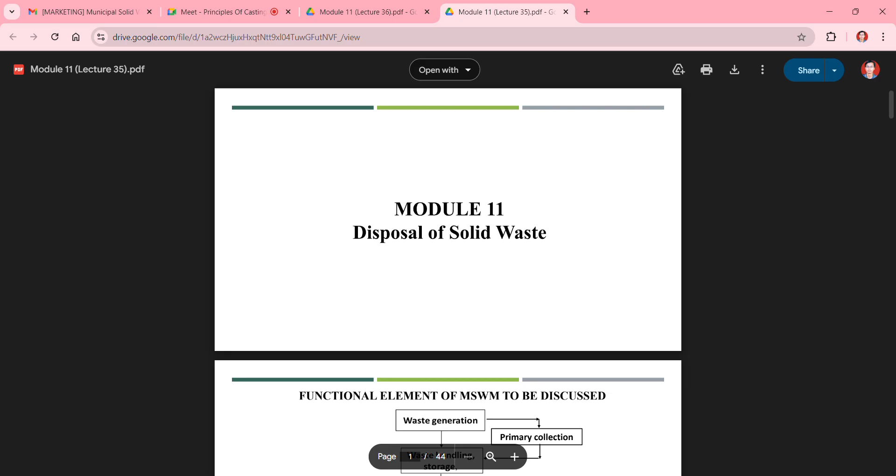We were talking about disposal of solid waste, which includes the landfill of the remaining solid waste left over after different treatment processes like metal recovery, anaerobic digestion, or composting. Whatever waste residue is left has to be landfilled. In the previous lectures, we talked about the criteria for selecting landfill sites and the basic requirements to create a landfill. We have to create a proper system to collect the leachate and gases, and in previous week lectures we learned about the collection system for leachates.

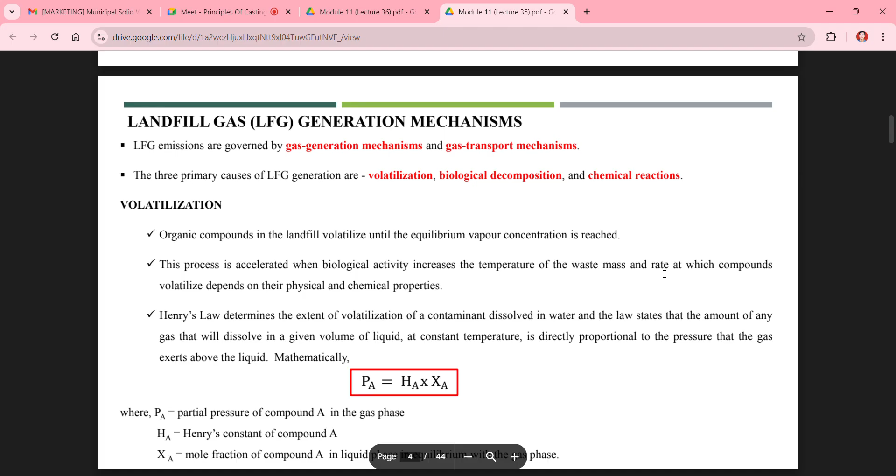In this week's lecture we will talk more about landfill gas collection, which is generated from the landfill sites after landfilling of municipal solid waste. There has to be a proper landfill gas collection and treatment system at every landfill. This landfill gas is termed as LFG. What is the generation mechanism of this LFG? These are emissions governed by gas generation mechanism and gas transportation mechanism.

There are three primary causes which promote the formation of LFG. First is volatilization, then biological decomposition, and third is chemical reaction. These are three different primary causes which influence the generation of landfill gas during the landfilling process.

Organic compounds in the landfill volatilize until the equilibrium vapor concentration is reached. This process is accelerated when biological activity increases the temperature of the waste mass. As we discussed, these compounds have a certain volatilization temperature, and until that temperature is reached, the compounds are not going to volatilize. So temperature increases due to the different biological activities happening inside the landfill.

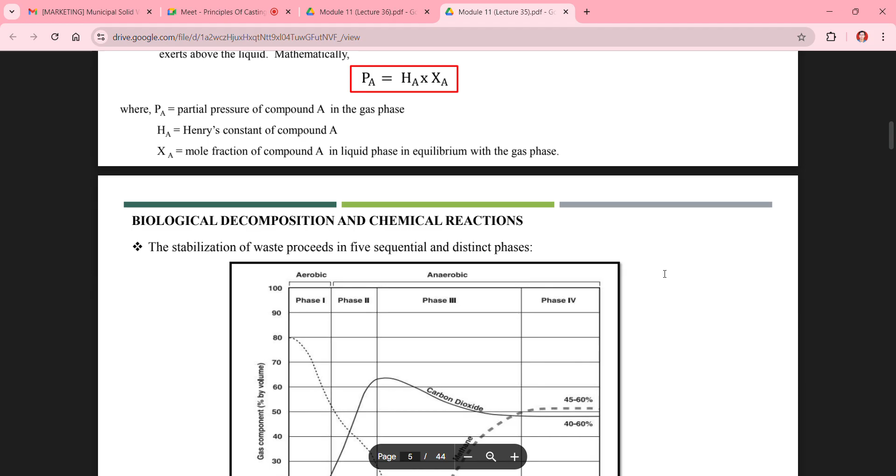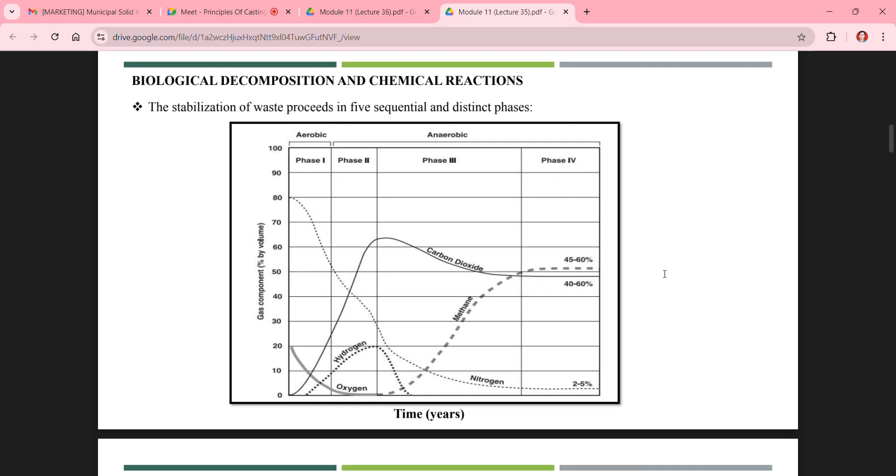During that anaerobic digestion process, whatever oxygen is present inside that landfill site will convert the organic compounds into carbon dioxide. After the conversion of carbon dioxide, there will be the methanation process, nitrogenation, and hydrogen evolving process. So after a time period of around 4 to 5 years, there will be less carbon dioxide generation compared to methane gas, so that gas can be reused as fuel material if we are able to capture that landfill gas. Then there are different phases of decomposition during the biological or chemical transformation process.

First phase is the initial adjustment phase, or aerobic phase. In this aerobic phase, the organic compound reacts with the water content and converts into the glucose part, and it will evolve hydrogen gas at the same time. All these things happen due to the microbial actions inside that landfill site.

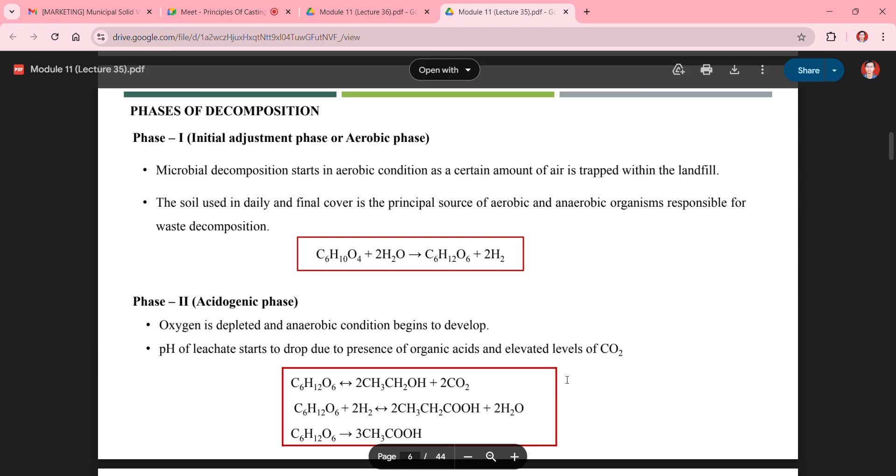Then the second phase is the acidogenic phase. In this phase, the glucose generated during the aerobic phase gets converted into acid compounds. So the pH of the leachate starts to drop due to the presence of organic acids and elevated levels of CO2. In the aerobic phase, we can maintain a pH of around 7, 8, 9, or 10.

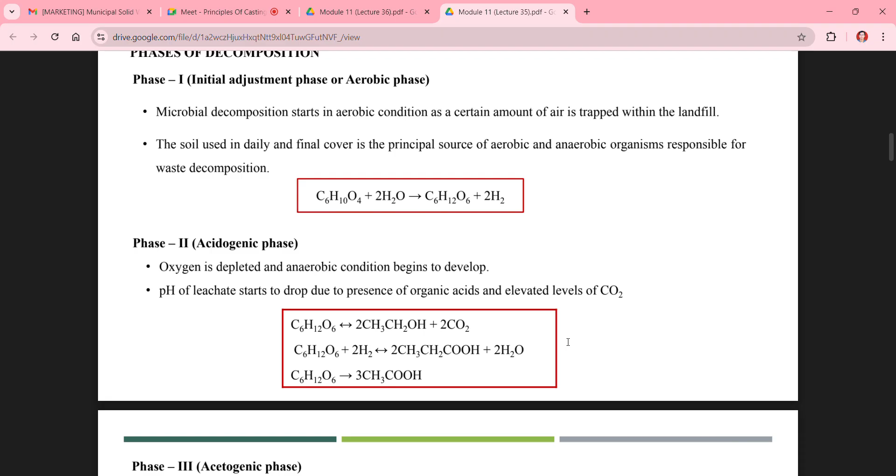But during the acidogenic phase, due to the reaction for conversion of glucose compounds into different types of organic acids, like acetic acid, formic acid, or glutonic acid, these acids create an acidic pH environment in the landfill site, and that helps drop the pH of the leachate which we are collecting at the landfill site.

Then the third phase is the acetogenic phase. In this phase, there is production of a significant amount of organic acids, and CO2 will be the principal gas generated during this phase. The pH of the leachate drops significantly, and COD and BOD of the leachate increases significantly - chemical oxygen demand and biological oxygen demand get increased. Many essential nutrients are also removed in the leachate, and if the leachate is not recycled, the essential nutrients will be lost from the system.

Then the fourth phase is the methane fermentation phase. In this phase, whatever acids were generated during the first, second, and third phases will further decompose into methane gas. So the pH will again rise, changing from the acidic value to the neutral value, because the acidic content in the leachate or landfill site gets decomposed into methane gas and CO2 gas.

In this phase, the amount of CH4 gas increases compared to CO2 gas. The gas generated during this phase contains around 55 to 60% methane gas, while CO2 is on the lower side at around 40 to 45%. Due to the higher content of CH4 gas, the gas generated during this process can be used as a fuel source if we are able to properly capture it, so we require a proper setup for capturing this gas generated during the methane fermentation phase.

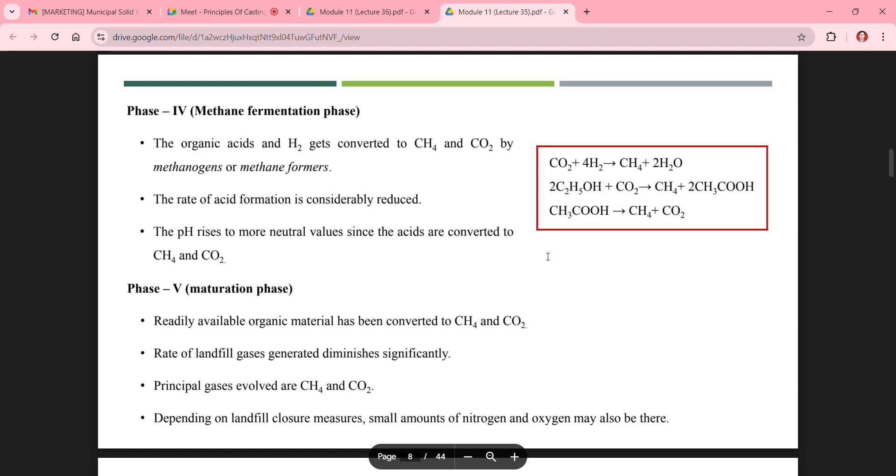Then the last phase is the maturation phase. The readily available organic material gets converted into CH4 and CO2 gases, and the rate of landfill gas generation diminishes significantly.

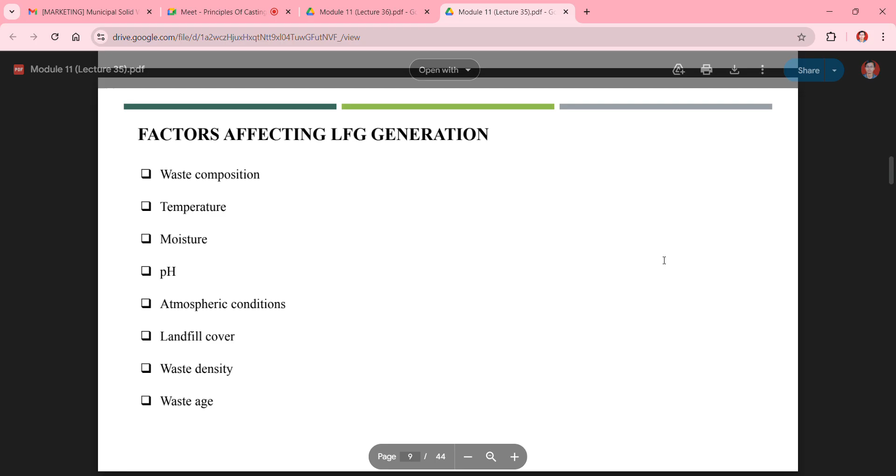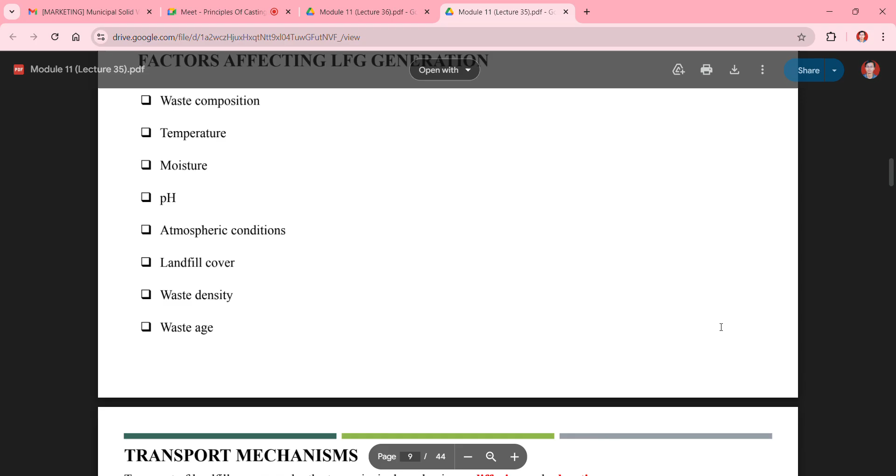Then there are different factors which affect the generation of the LFG, like waste composition, temperature, moisture content which has to be at an optimum level, and pH level which has to be neutral to generate CH4 or CO2 gases in proper amounts. Then atmospheric conditions, landfill cover type, density of the waste, and age of the waste material - whether the landfill started 5 or 10 years ago - because with increase in the year of the landfill site, the composition of the LFG can vary.

Then we have to create a proper transport mechanism for capturing these landfill gases. The transport of landfill gases occurs by two principal mechanisms.

One is diffusion and second one is advection - how these LFGs are moving inside a landfill site. Based on these transport mechanisms, we will develop a proper system for capturing these landfill gases.

First one is diffusion. The diffusive flow of gas is in the direction in which its concentration decreases. As we know, according to the thermodynamic principle, anything will move from higher concentration to lower concentration, and concentration of a volatile constituent in the LFG will almost always be higher than that of the surrounding atmosphere.

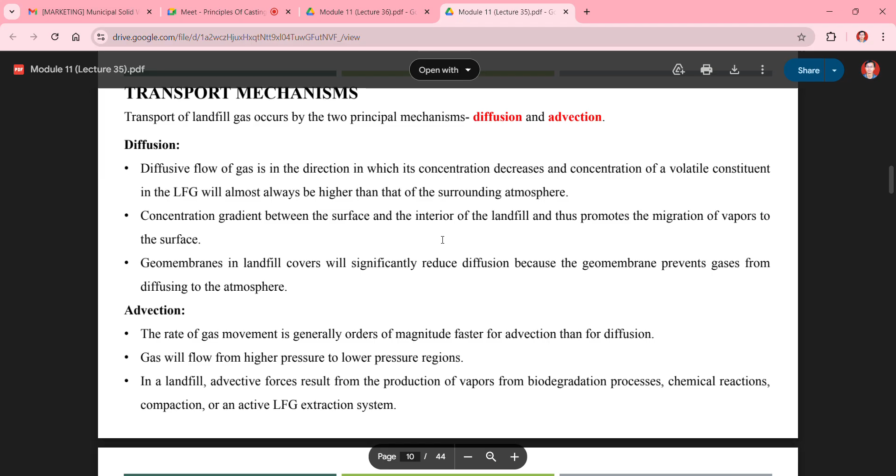There has to be a concentration gradient between the surface and the interior of the landfill, so that the LFG can move upward and we can properly capture it, thus promoting the migration of vapors to the surface. Geomembranes in landfill covers will significantly reduce diffusion, because the geomembrane prevents gases from diffusing to the atmosphere.

The trick is that we have to prevent diffusion of these gases, or migration of these gas vapors into the surroundings, because we have to capture them - we cannot leave them in the surroundings. We have to provide a proper geomembrane layer on the landfill as a landfill cover, so that we can prevent the diffusion of these gases into the surrounding atmosphere.

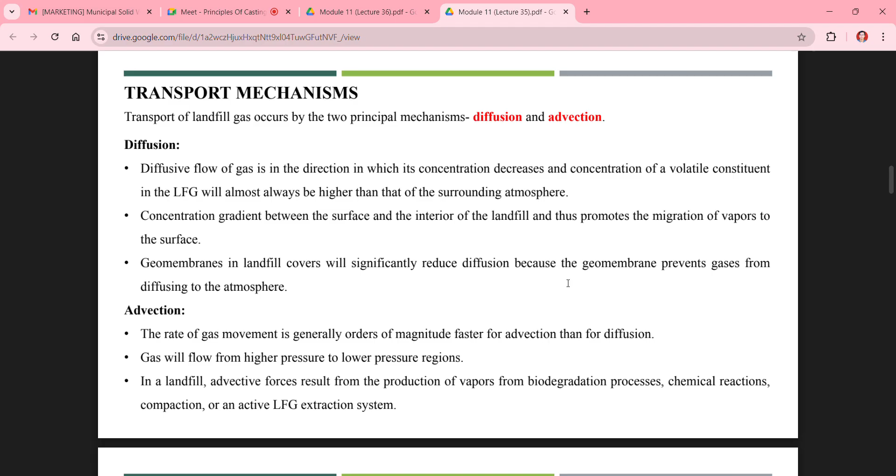We don't want diffusion of these gases into the surroundings because these gases majorly contain around 40% CO2 and 55 to 60% CH4 content, and these two gases make up the major part of the gas emission, so we don't want to leave them in the environment.

Then advection - the rate of gas movement is generally orders of magnitude faster for advection than for diffusion. Gas will flow from higher pressure to lower pressure regions. In a landfill, advective forces result from the production of vapors from biodegradation processes, chemical reactions, compaction, or an active LFG extraction system.

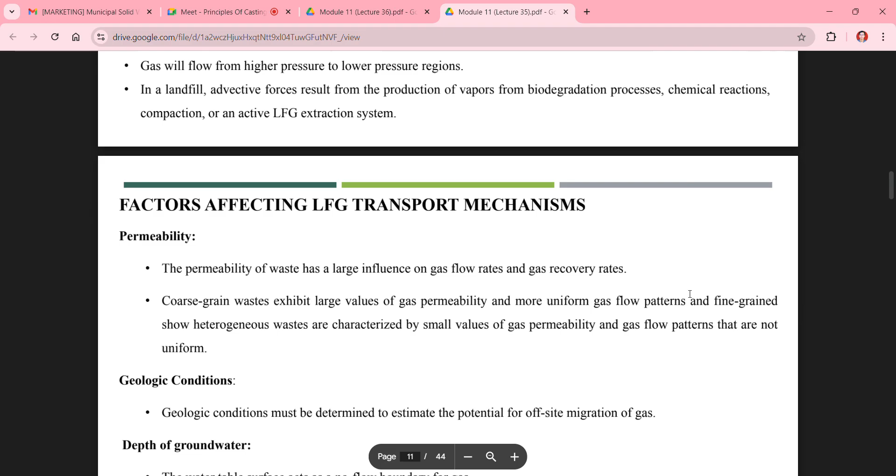So there are different factors which can affect the transport mechanism of this LFG. First one is permeability. The permeability of waste has a large influence on gas flow rates and gas recovery rates, because gas will move from one pore to another pore.

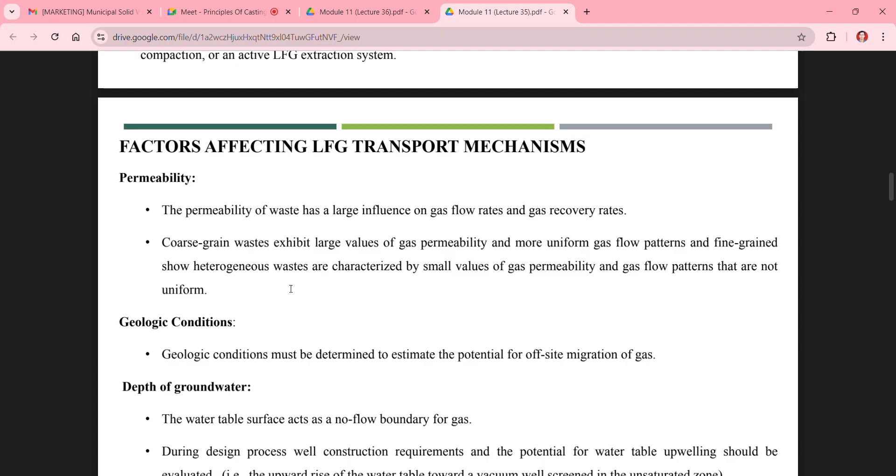Coarse grained waste exhibits large values of gas permeability and more uniform gas flow patterns, while fine grained and heterogeneous waste are characterized by small values of gas permeability and gas flow patterns that are not uniform. So there has to be a proper amount of porosity, or permeability, inside a landfill site for the proper flow of gases.

Then there are some geologic conditions. Geologic conditions must be determined to estimate the potential for offsite migration of gas.

Then depth of groundwater - the water table surface acts as a no flow boundary for gases, because gases are not going to diffuse inside the water since it already has a vapor pressure higher than the gases generated in a landfill site. During design, well construction requirements and the potential for water table upwelling should be evaluated - that is the upward rise of the water table towards a vacuum well screened in the unsaturated zone.

Then there are different types of man-made features, like in some instances underground utilities.

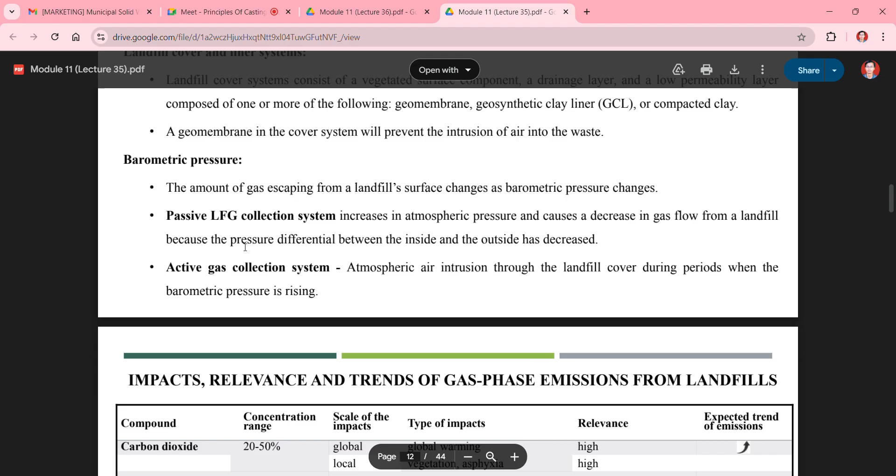Then barometric pressure - the amount of gas escaping from a landfill surface changes as barometric pressure changes. In a passive LFG collection system, an increase in atmospheric pressure causes a decrease in gas flow from the landfill, because the pressure differential between the inside and outside has decreased. This will create a huge problem during the collection of these gases.

In an active gas collection system, atmospheric air intrusion occurs through the landfill cover during periods when the barometric pressure is rising. So we have to maintain that barometric pressure for the proper collection of these LFGs from the landfill site.

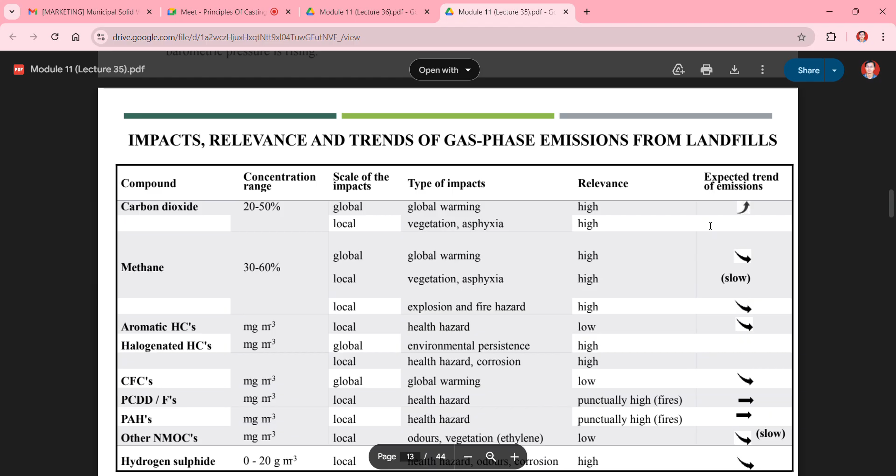Then there are impact, relevance, and trends of gas phase emissions from landfills - so there are some factors. Then, design of landfill gas system.

For the proper capturing of these landfill gases from a landfill site, we have to design a proper landfill gas system. First thing - design of gas wells.

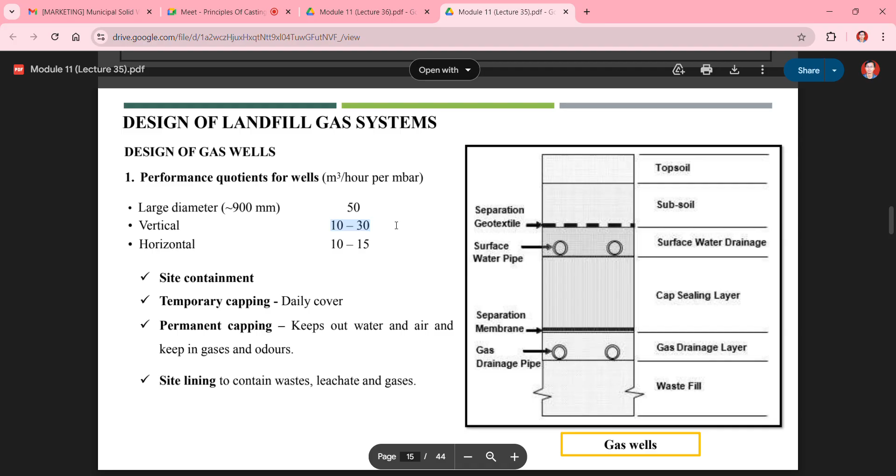Performance quotients for wells is defined as meter cube per hour per millibar. Large diameter can be up to around 900 mm, vertical wells 10 to 30, and horizontal wells 10 to 15.

So gas wells can be divided into this structure: topsoil, then subsoil, surface water drainage system, cap sealing layer, gas drainage layer, and waste fill.

Yeah, Omawani, you want to say something? Okay.

Coming to site containment: temporary capping, there's our daily cover, then there is permanent capping, which keeps out water and air and keeps in gases and odors. Then site lining to contain waste, leachate and gases.

Then we have to optimize the gas well operations, like minimize the gas velocity approaching the well by making the well diameter large. Then for maximizing the effective length of the gas well, we can make the gas well deep and keep it dry.

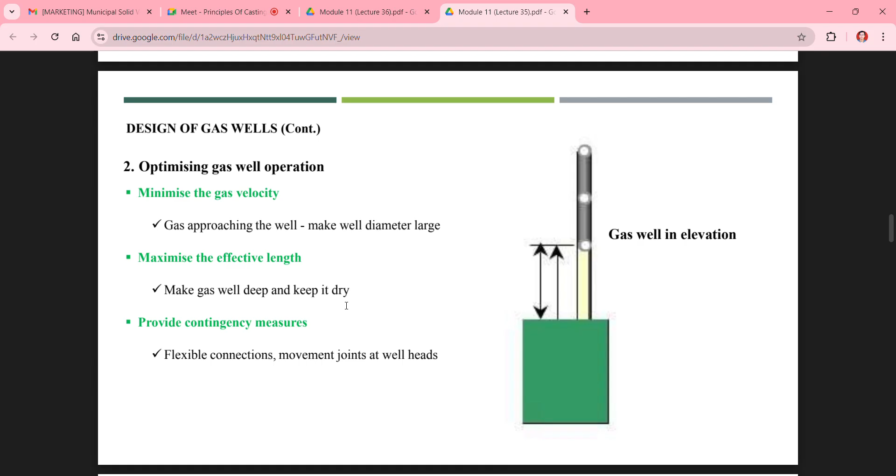And then provide contingency measures. There are flexible connections, movement joints at well heads.

Then gas flow always gives pressure losses. The loss in pressure for gas flow rate is defined as P equal to 60,000 into Q square upon ID to the power 5. There is a rule of hundreds defined for gas pipes: the gas pipe flow should be able to control a flow of around 100 meter cube per hour in a 100 mm diameter pipe (outer dia), and 100 meter long gives only 6 millibar loss.

Then coming to gas collection systems, there are different types. One is the passive gas system. In the passive gas system, a gas collection pipe is provided inside the landfill above the waste. This pipe has holes so that gas can purge inside it and easily vent out on the upper layer of the landfill site.

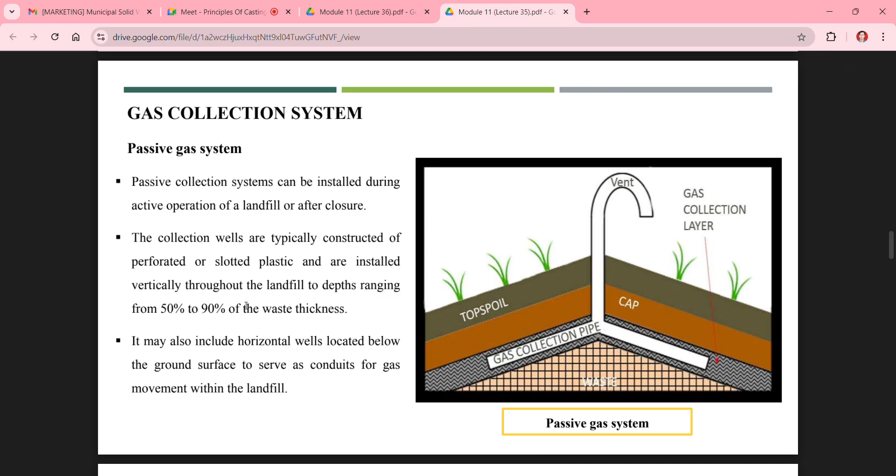Passive collection systems can be installed during the active operation of a landfill or after closure. The collection wells are typically constructed of perforated or slotted plastics and installed vertically throughout the landfill to a depth ranging from 50% to 90% of the waste thickness. It may also include horizontal wells located below the ground surface to serve as conduits for gas movement within the landfill.

Then there is another gas collection system known as the active gas system. The active gas collection system includes vertical and horizontal gas collection wells similar to the passive collection system. Wells in active systems have valves to regulate gas flow and to serve as a sampling port.

Sampling allows system operators to measure the amount of gas generation, the composition of the gas, and the pressure, so we can control the pressure—since gas moves from the higher pressure to the lower pressure side. We can control that pressure system in this active gas system.

Then there are vacuums or pumps to move gas out of the landfill, and piping that connects the collection wells to the vacuum. We generate a vacuum system on the upper side of the well, so that due to the vacuum, the pressure of the gases will be higher on the landfill side, causing gases to move toward the vacuum side so we can easily collect the gases generated during these landfill operations.

Then the size, type and number of vacuums required in an active system to pull the gas from the landfill depend on the amount of gas being produced.

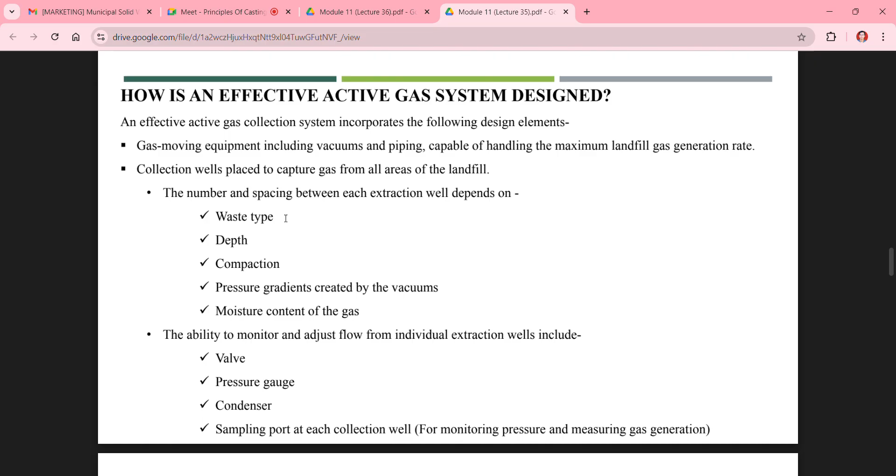Then collection wells are placed to capture gas from all areas of the landfill. The number and spacing between each extraction well depends on the waste type landfilled inside that site, depth of the extraction well, compaction, pressure gradients created by the vacuums, then moisture content of the gas. Then the ability to monitor and adjust flow from individual extraction wells includes valve, pressure gauge, condenser, and a sampling port at each collection well for proper monitoring of pressure and measuring gas generation.

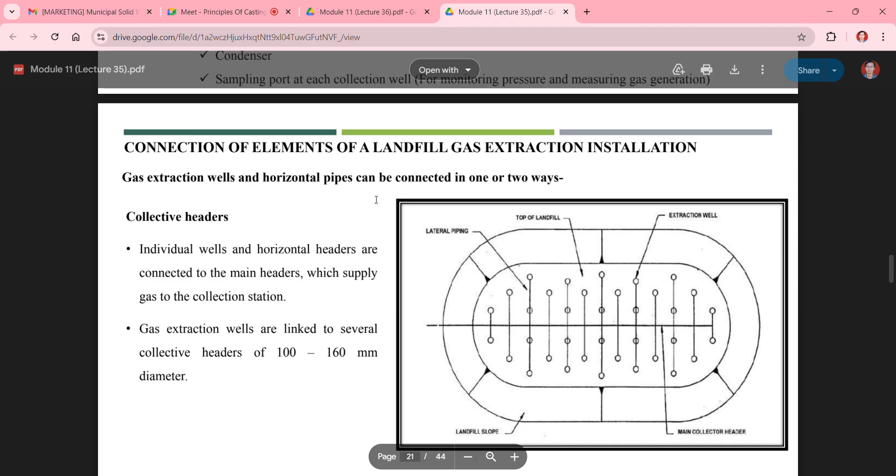Then connection of elements of a landfill gas extraction installation. Gas extraction wells and horizontal pipes can be connected in one or two ways. One is collective headers.

Individual wells and horizontal headers are connected to the main header, so as we can see, we have connected different lines. These are the collection extraction wells. These extraction wells are connected through this pipe, and this pipe is connected with all of the extraction wells, so that we can collect the gas from here. So individual wells and horizontal headers are connected to the main headers which supply gas to the collection station.

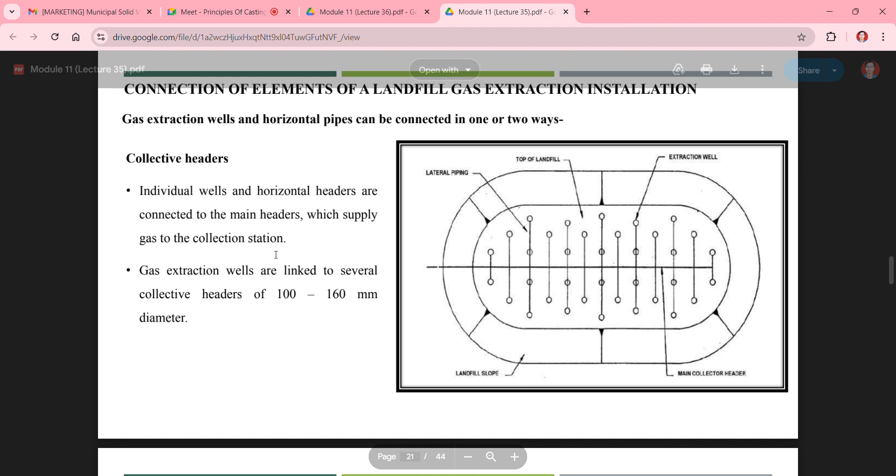Gas extraction wells are linked to several collective headers of 100 to 160 diameters. Then at last there has to be a gas collection station.

The gas collection station is comprised of the following units: central collectors connected to pipeline to transmit gas of the landfill, then blowers to extract gas from the landfills, filters to remove solid particles from the gas, reservoirs where condensate is removed from the gas, then instruments for control of gas extraction and transport, measuring and control equipment.

So why are emissions monitored at landfills? Landfill gas emissions may be monitored for one or more of the following reasons. First one is the landfill gas control system, because we have already discussed it will take around 3 to 4 years at least to generate the proper amount of CH4 gas content in a landfill gas.

So we have to frequently monitor the landfill gas emissions from a particular landfill, so that whenever the amount of CH4 is going to get higher in these LFGs, we can use it as a fuel source, to determine the general composition and volume over time of air contamination emanating from the landfills. With the help of this, we can also determine the general composition of the gases to prevent air contamination

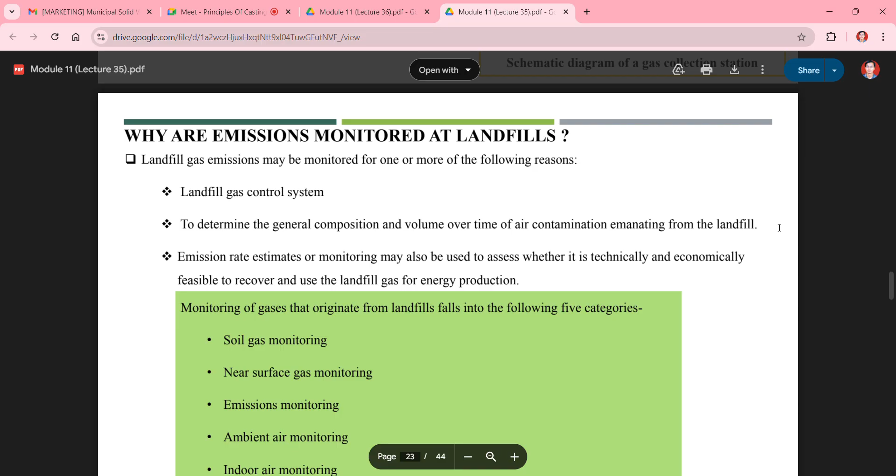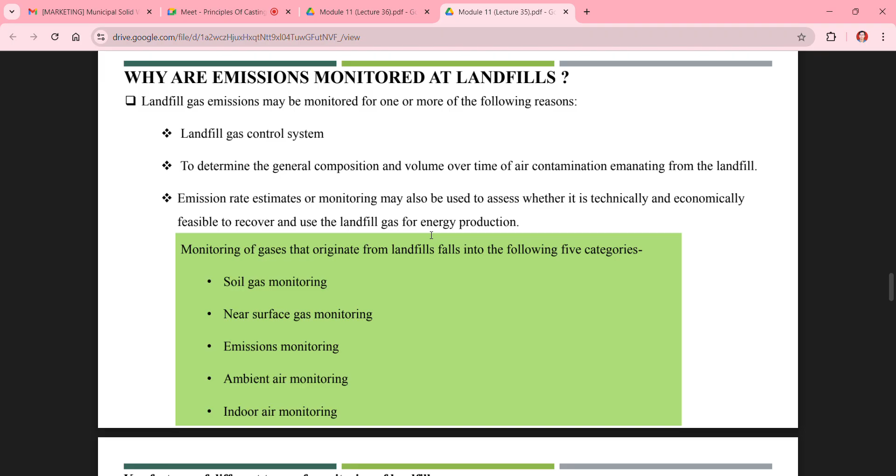via CO2 or CH4 gases. Emission rates, estimates, or monitoring may also be used to assess whether it is technically and economically feasible to recover and use the landfill gas for energy production. Because for the LFGs to be used as a proper fuel source, the amount of CH4 gas has to be at a minimum of around 55 or 60% of the total gas composition. So for that also we have to frequently monitor the gas collection systems.

Monitoring of gas that originates from landfills falls into the following five categories: soil gas monitoring, near surface gas monitoring, emission monitoring, ambient air monitoring, and then indoor air monitoring. So there are some key features for different types of landfill monitoring of different types of landfill gases.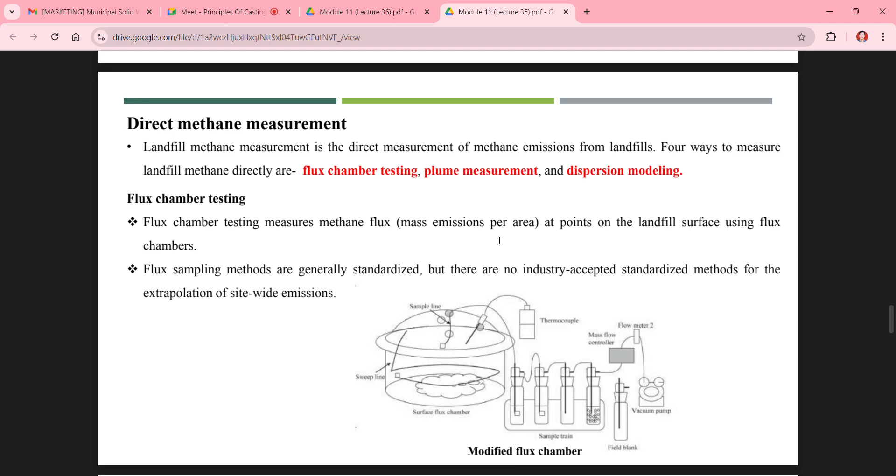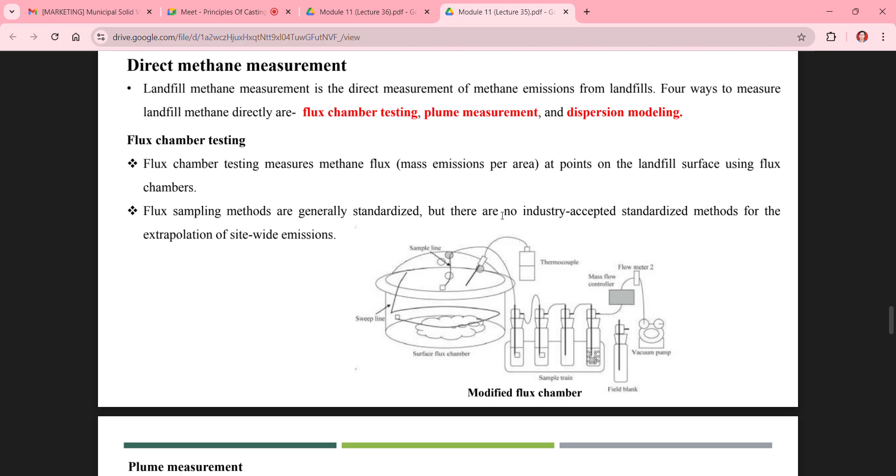In flux chamber testing, methane flux, that is mass emission per area, is measured at points on the landfill surface using flux chambers. Here is a typical diagram of a modified flux chamber. The flux sampling methods are generally standardized, but there are no industry accepted standardized methods for the extrapolation of site-wide emissions, so that can vary according to industry. Different industries have different SOPs for the flux chamber testing of a landfill site.

Another one is plume measurement. Plume measurement methods use ground-based optical sensors to measure the methane plume coming from the landfill, and those plume measurements are then used to calculate the landfill's methane emission rate.

Air dispersion modeling can be used to determine emission rates from the landfills. This method monitors on-site and/or downwind methane concentrations using a dispersion model to calculate methane emission from the landfill.

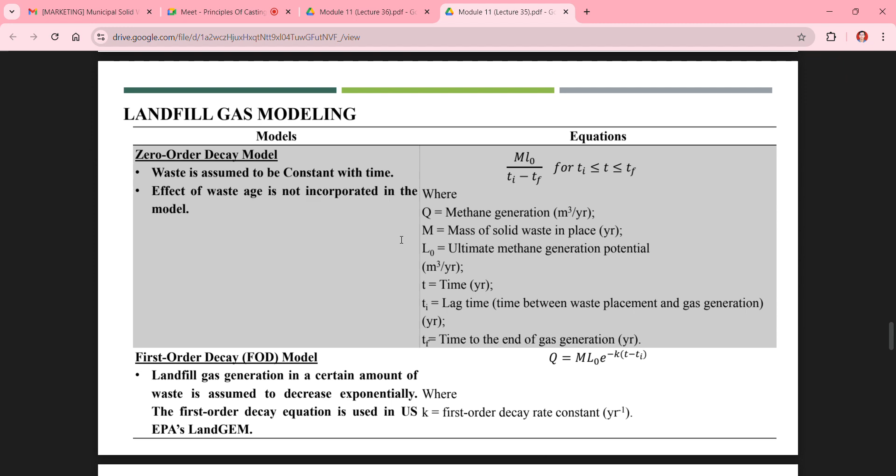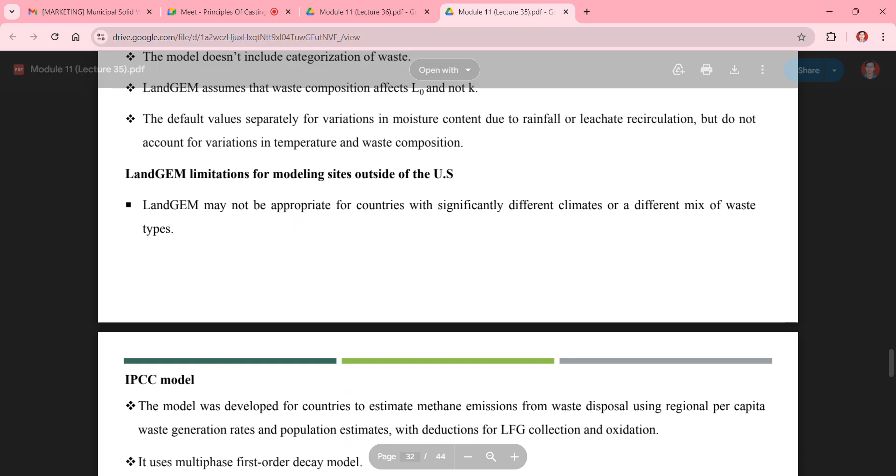There are some models based on which we can design landfill gas modeling, like zero order decay model or first order decay model. Then there is modified first order model, and then there is the LandGEM model. We have to take some assumptions for creating these different types of models.

There are various factors which affect the calculation of these models. In different areas, different types of models have to be calculated, based on which we can properly design a landfill gas collection system at a landfill site.

Then landfill gas contaminants and their removal. For direct reuse of collected raw gas, raw landfill gas is impaired by contaminants such as hydrogen sulfide, siloxanes, moisture, etc. But what we need as a fuel source is generally at least 55 to 60% CH4 gas inside the gas to use it properly as a fuel source. So these contaminants have to be removed before using landfill gas as a fuel source.

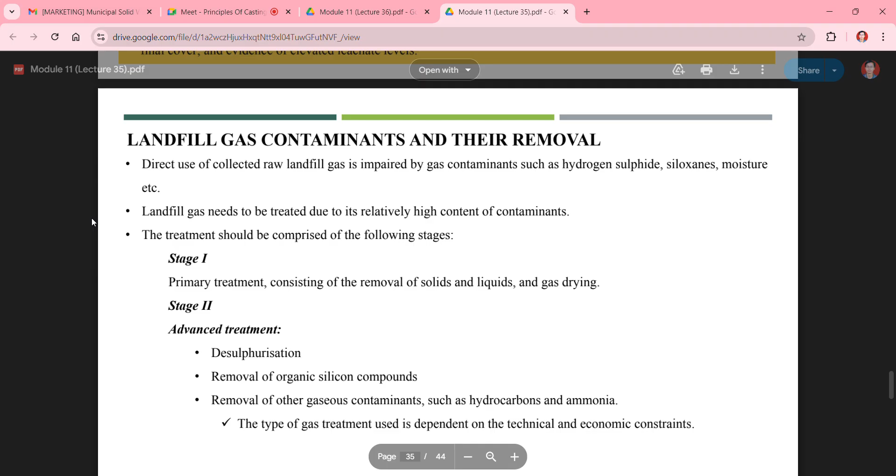So landfill gas needs to be treated due to its relatively high content of contaminants. The treatment should be comprised of the following stages: in the first stage, we do primary treatment processes consisting of the removal of solids and liquids.

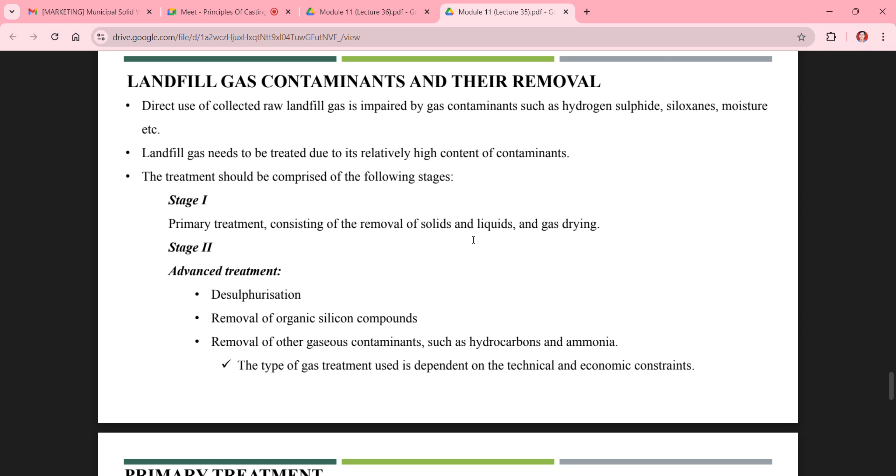We create a vacuum at the upper side of the landfill gas collection system for proper removal of landfill gases from a site. Due to that vacuum creation, there are high chances that some amount of solids, liquid, or moisture content can also come inside these gases due to the higher vacuum generation. So those solids and liquids have to be removed, and the gas has to be dried properly.

Then stage two, also known as advanced treatment process, consists of desulfurization. Because if we don't desulfurize the gas, burning it will create SOx emissions, which are hazardous in nature. So we have to properly desulfurize the gas before using it as a fuel source.

Then removal of organic silicon compounds, then removal of other gaseous contaminants such as hydrocarbons and ammonia. The type of gas treatment used is dependent on technical and economic constraints.

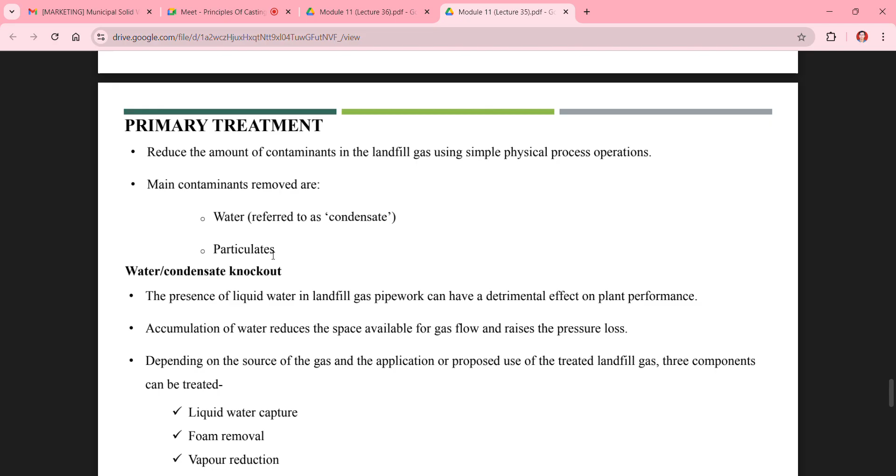Coming to primary treatment, it reduces the amount of contaminants in landfill gas using simple physical process operations. The main contaminants removed during primary treatment are water, also referred to as condensate, and particulates, which are solid particles coming inside that landfill gas.

Water or condensate can be knocked out; the presence of liquid water in landfill gas pipework can have a detrimental effect on plant performance. Accumulation of water reduces the space available for gas flow and raises the pressure loss. Depending on the source of the gas and the proposed use of the treated landfill gas, three components can be treated: liquid water capture, foam removal, or vapor reduction.

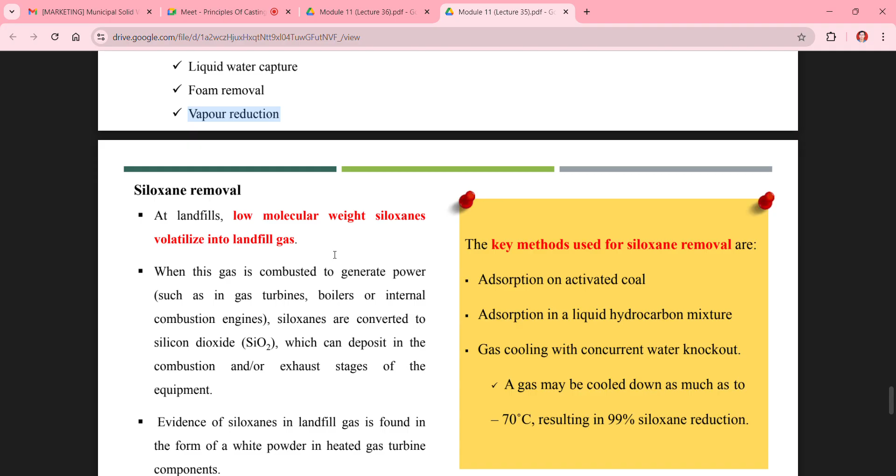For removal of siloxanes in landfill gases, at landfills low molecular weight siloxanes volatilize into landfill gas. When this gas is combusted to generate power, such as in gas turbines, boilers, or internal combustion engines in industries, siloxanes are converted to silicon dioxide, SiO2, which gets deposited on the surface of the exhaust pipes or the pipes carrying the gases.

The deposit of this SiO2 compound on the wall surfaces is going to choke the entire system, and that will create a huge problem during operations in gas turbines or boilers. Evidence of siloxanes in landfill gas is found in the form of a white powder in heated gas turbine components.

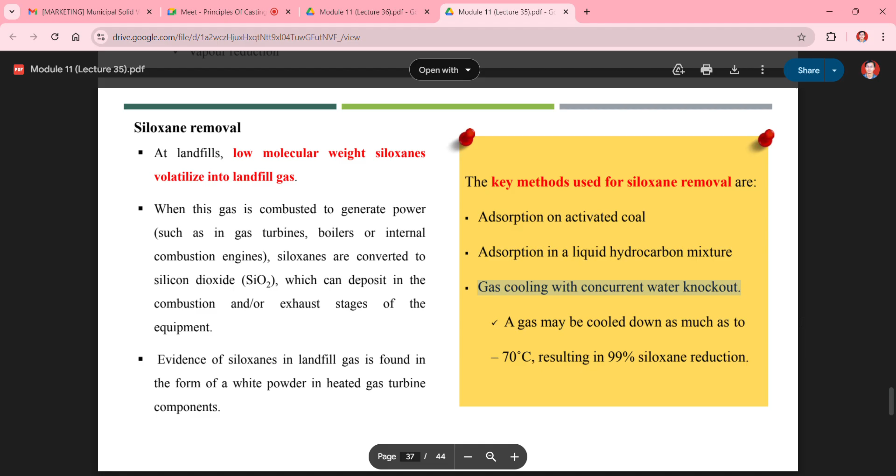The key methods used for siloxane removal are adsorption on activated coal, adsorption in a liquid hydrocarbon mixture, and gas cooling with concurrent water knockout. Gas may be cooled down to around minus 70 degrees Celsius, resulting in 99% siloxane reduction.

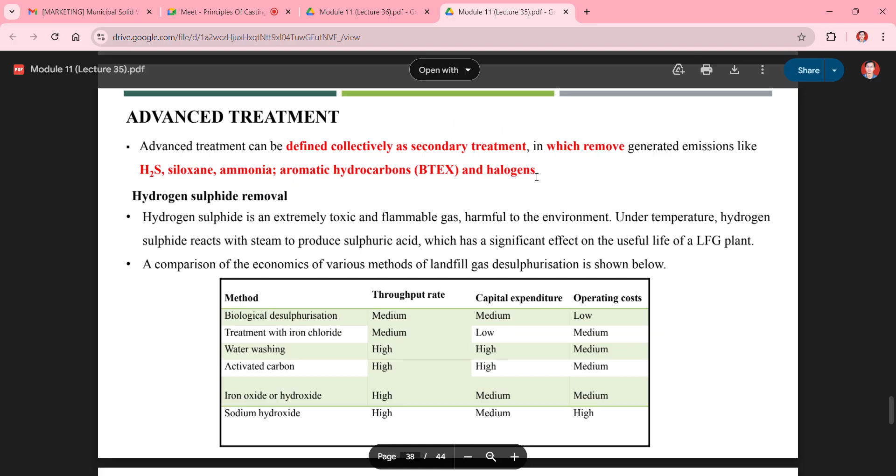Then there are some advanced treatment processes. Advanced treatment can be defined collectively as secondary treatment, which removes generated emissions like H2S, siloxanes, ammonia, aromatic hydrocarbons, and halogens. For hydrogen sulfide removal, hydrogen sulfide is an extremely toxic and flammable gas which is harmful to the environment.

Under temperature, hydrogen sulfide reacts with steam to produce sulfuric acid, which has a significant effect on the useful life of an LFG plant. Because sulfuric acid is highly corrosive in nature, it will affect the entire life of the plant. A comparison of the economics of various methods of landfill gas desulfurization is shown below.

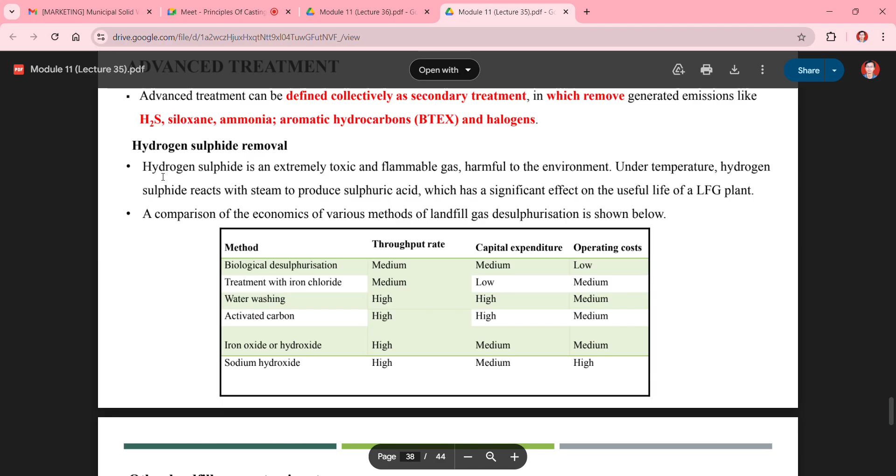There are different methods for removal of sulfides from LFG gases, like biological desulfurization, treatment with iron chloride. The iron chloride converts into FeS, which has a very low dissolution in water. Then there's water washing, which converts H2S gas into H2SO4, and H2SO4 can be collected as a liquid. Then there's activated carbon, iron oxide or hydroxide treatment, or sodium hydroxide treatment.

Landfill gas may also contain other contaminants like ammonia, aromatic hydrocarbons like benzene, toluene, ethylbenzene or xylene, and some halogens. These contaminants are usually present at concentrations below the detection level. The concentration of ammonia is below 0.1 milligram per meter cube, aromatic hydrocarbons are below 1 milligram per meter cube, and halogens are below 0.1 milligram per meter cube, facilitating immediate use of gas without need for additional treatment.

Generally, we don't have to treat the landfill gas for these contaminants because they are already low inside the LFG gases. But in some cases, if they are on the higher side, we have to go for proper treatment processes for removal of these contaminants before using the landfill gases.

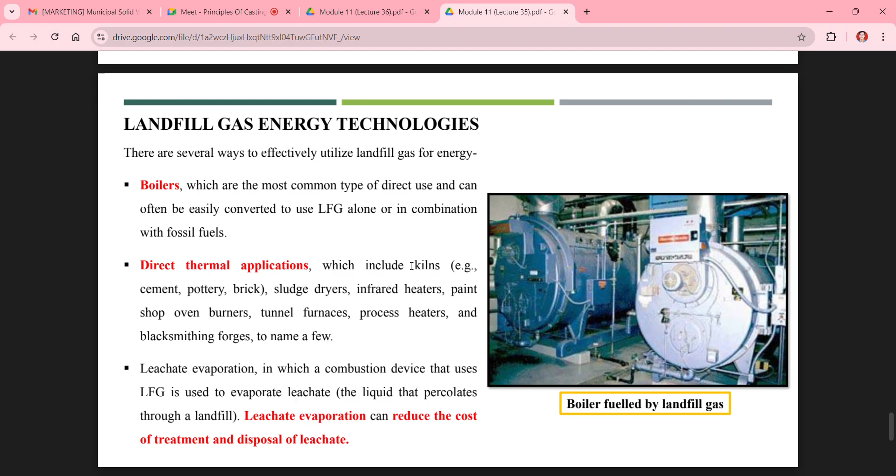Then there are landfill gas energy technologies. We can use landfill gas as a fuel source for generating steam with the help of a boiler, and that steam can be used for generation of electricity inside a waste-to-energy conversion power plant.

Then we can go for biomethane production. Biomethane is a gaseous fuel with physicochemical properties similar to natural gas, which makes it possible to inject it into the gas grid. LFG can be upgraded to biomethane by removing carbon dioxide, which is around 40 to 50%, and trace contaminants such as ammonia, hydrogen sulfide, and siloxane.

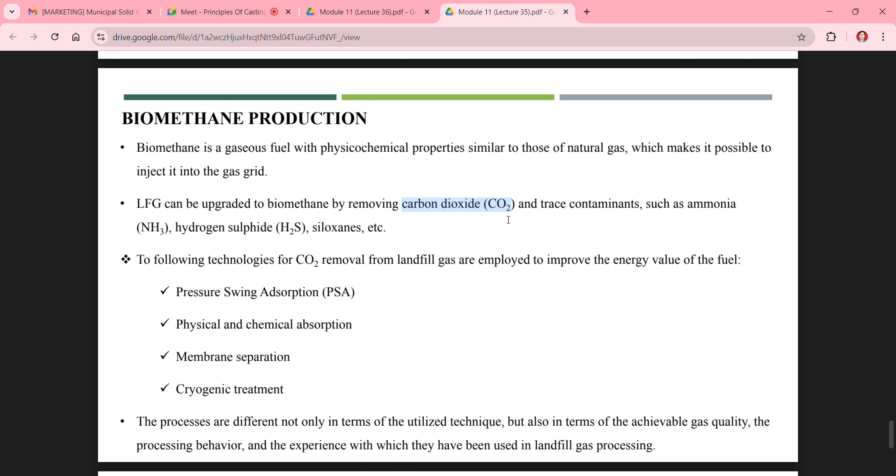In biomethane, the content of CH4 has to be at a higher content of around 95 to 96% at least, so it can be considered biomethane. For the proper composition, we first have to remove the carbon dioxide, which is the major composition at around 30 to 40%, and trace contaminants such as ammonia, hydrogen sulfide, and siloxanes.

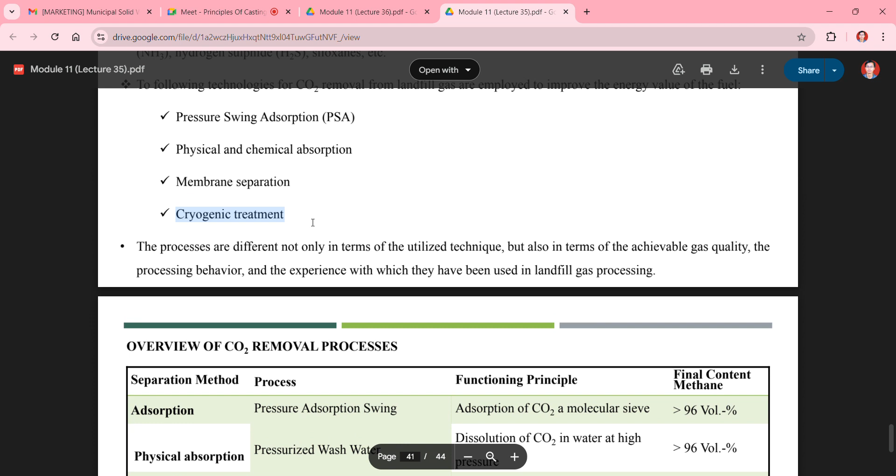Following technologies for CO2 removal from landfill gas are employed to improve the energy value of the fuel: pressure swing adsorption, physical and chemical absorption which can be done with different types of liquids, or carbon absorption process, then membrane separation and cryogenic treatment. In cryogenic treatment, we apply a temperature of around minus 70 or minus 100 degrees Celsius, so the CO2 gas converts into liquid form and can be easily removed from the LFG gases produced in landfill sites.

The processes differ not only in terms of utilized techniques but also in terms of achievable gas quality, processing behavior, and the experience with which they have been used in landfill gas processing.

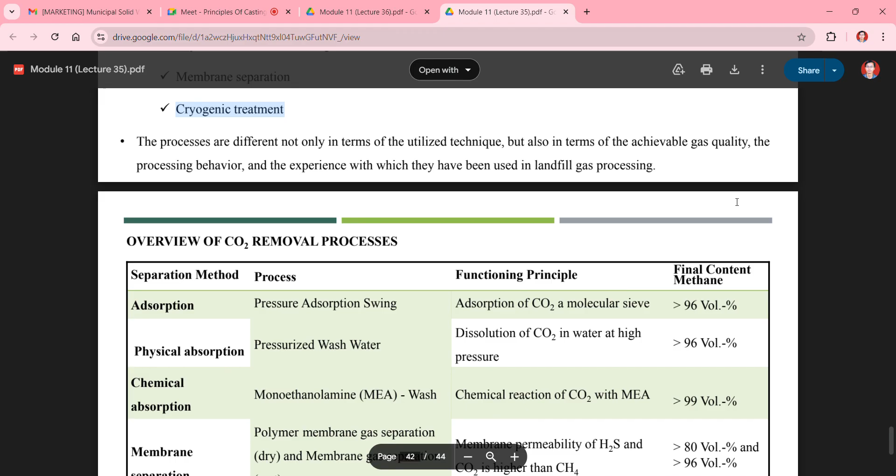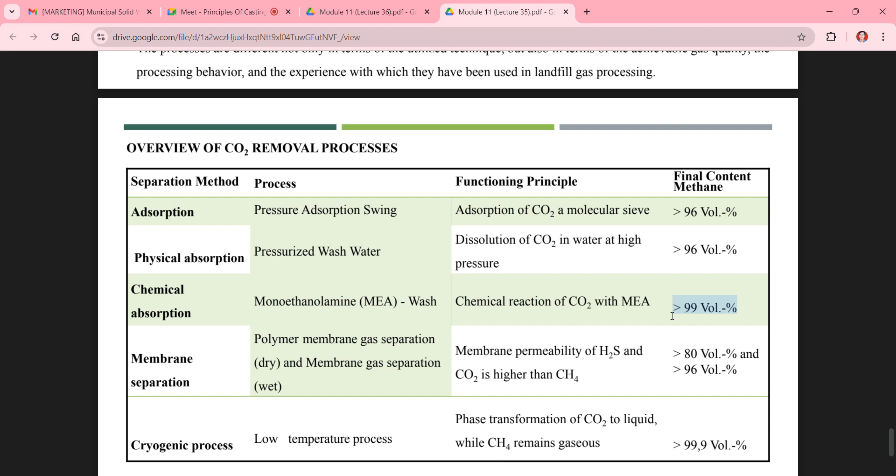Overview of CO2 removal process: with adsorption, we can get a final methane content of more than around 96%. Similarly, in physical absorption, we can also get a final methane content of more than 96%, while in chemical absorption, we can get a final methane content of more than 99%. In membrane separation process, we can get a methane content of more than 80%. In the cryogenic process, we get the highest purity due to conversion of CO2 into liquid form while CH4 remains in gaseous form, giving a purity of around 99.9% CH4 in the biomethane gas.

There are some reasons for landfill gas controls. The following is a list of common reasons for controlling the gas produced by a landfill. It can prevent air pollution, as already discussed. If landfill gas is released into the environment, it will create a major burden on greenhouse gases, since it majorly contains CH4 and CO2, around 99%.

It will contribute to the greenhouse gas emissions, so we need to reduce it. By preventing the release of these gases into the air, we can prevent air pollution, reduce hazards due to off-site migration, and prevent damage to the landfill cover slope stability. It can control odor, and with the help of landfill gas control, we can also recover energy and prevent vegetation distress on the landfill site.

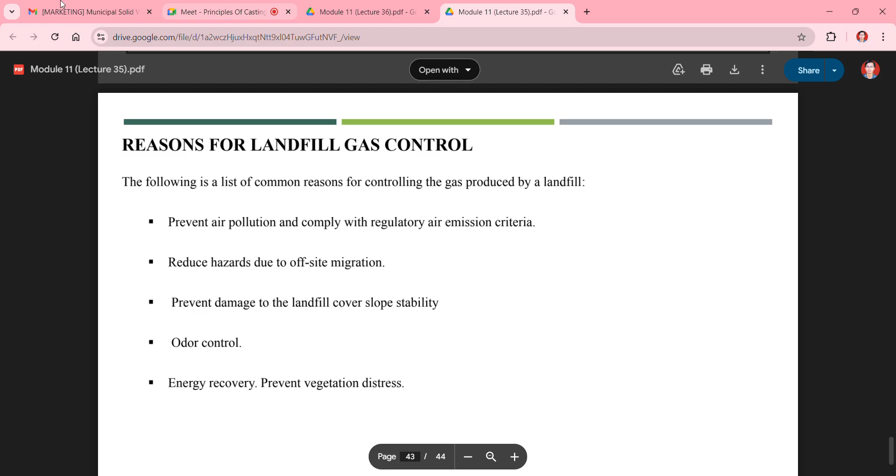So now coming to the next lecture. We have talked about the landfill gas generation process, how we can design a proper system for the collection of those landfill gases, and how we can refine them for further use as a biofuel.

Then coming to the design of landfill. We have to design the landfill keeping in mind some factors, like how much solid waste is generated and up to how much height we can fill that landfill site.

We will go through an example: estimate the required landfill area for a community with a population of 31,000, assuming the following conditions. Solid waste generation is around 2.9 kg per capita per day, and the compacted specific weight of solid waste has a density of around 475 kg per meter cube.

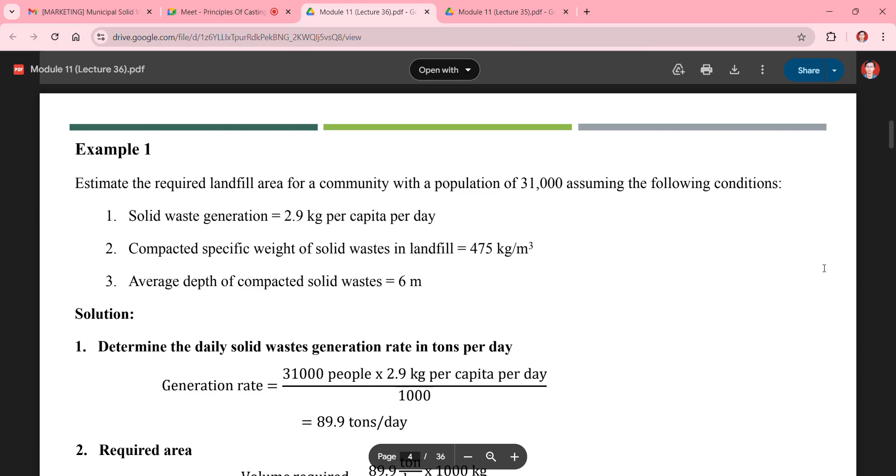Average depth of compacted solid waste is 6 meters, so we cannot go more than 6 meters height for the landfill. First, we have to calculate the amount of solid waste generated in 1 year using the generation rate.

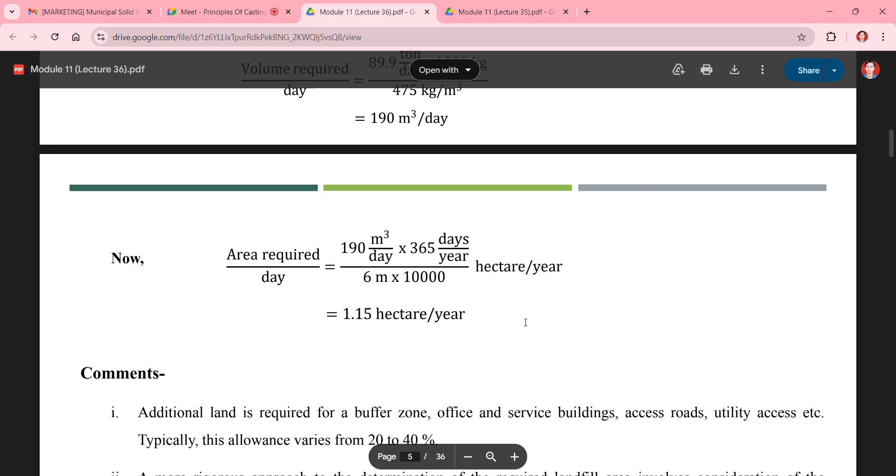Per day volume requirement will be around 190 meter cube per day. We have already discussed that we have to design a landfill for at least 10 to 15 years. So here we can calculate the design of a landfill for 1 year, which comes to 1.15 hectare per year.

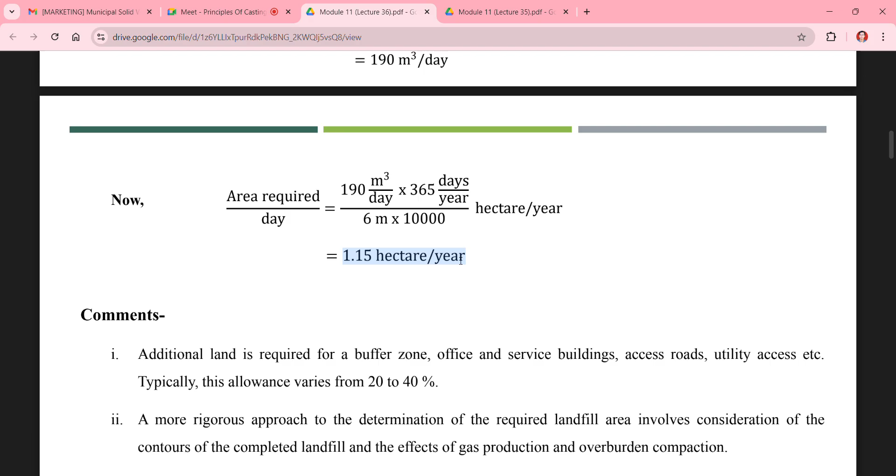Additional land is required for a buffer zone, office and service building, and that allowance has to be considered at around 20 to 40%. Based on this, it will include around 0.23 hectare per year as a buffer zone. So total it will come to around 1.15 plus 0.23 hectare per year.

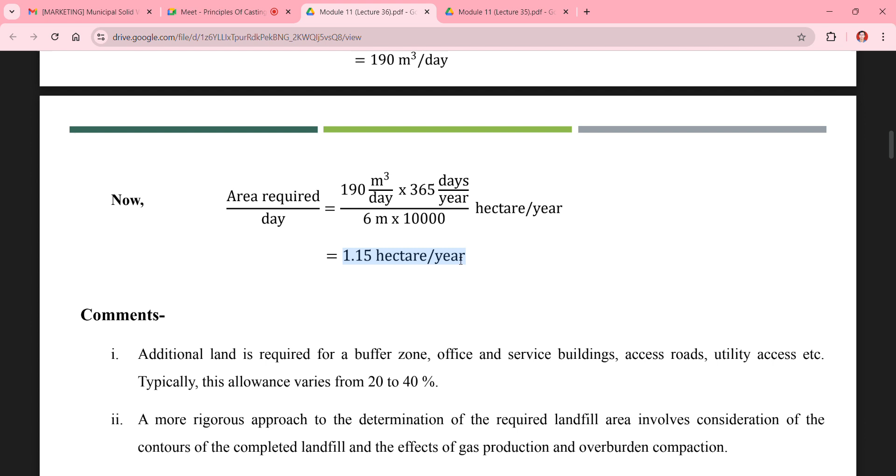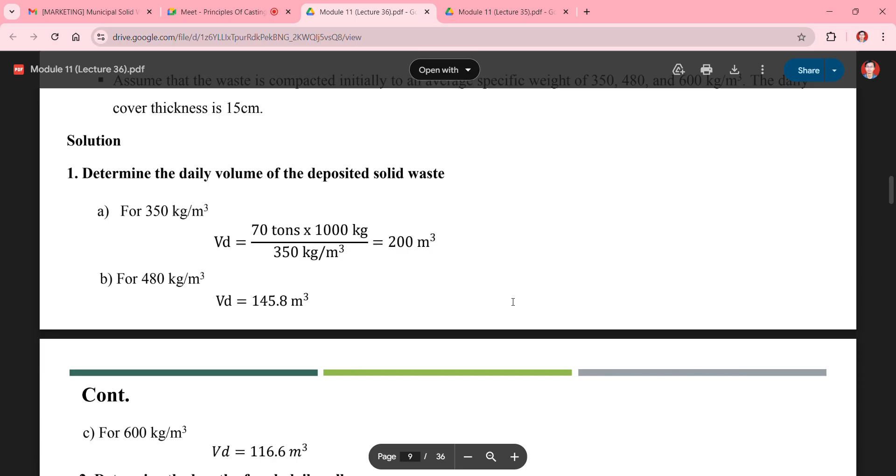Then determination of waste to soil ratio - these are some examples. Now coming to the present status of legacy waste and its impact on environment. There are two major challenges of solid waste management in our cities or towns: first, managing the continuous flow of solid waste on a daily basis; second, dealing with the legacy of neglect, which has resulted in garbage heaps built up at dump sites meant for waste processing and landfills.

The sites for landfills were originally located outside of the cities, but as the cities have expanded, the dump sites are now almost within the cities. For example, Delhi's open dump at Ghazipur has a height of around 69 meters, Okhla is 55 meters high, and Bhalswa is 56 meters high - all much higher than the permissible height limit of up to 20 meters.

It is estimated that more than 10,000 hectares of urban land is locked up in these dump sites in India, because we are not processing the waste before going for landfill. What we are doing is directly landfilling the waste generated in these cities. Landfill sites generate methane and other landfill gases which contribute to global warming, and they also produce leachate, which pollutes groundwater.

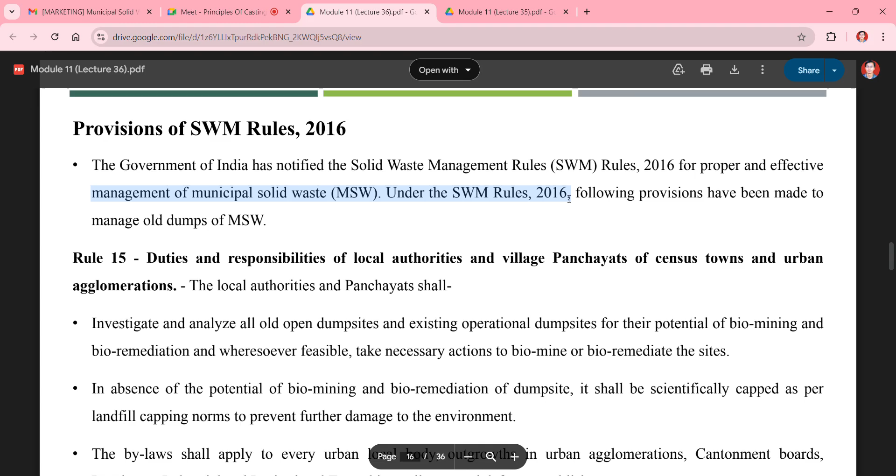Continuing on the present status of legacy waste - many municipal authorities across the country are opting for capping as a solution to the legacy of mixed waste, which is not the first option in order of priority for environmentally safe legacy waste management under the 2016 rule. The Government of India has notified the SWM Rules 2016 for proper and effective management of municipal solid waste. Under 2016, following provisions have been made to manage old dumps of MSW, under Rule 15.

Duties and responsibilities of local authorities and village panchayats of census towns and urban agglomerations. The local authorities and panchayats shall investigate and analyze all old open dump sites and existing operational dump sites for their proper potential biomining and bioremediation.

Wherever feasible, necessary action should be taken to biomine or bioremediate the sites. In the absence of potential for biomining and bioremediation of a dump site, it shall be scientifically capped as per landfill capping norms to prevent further damage to the environment.

So biomining is like providing a proper system in these landfill sites to collect the biogases, or we can say the leachate contents, from there, and we are going to reuse that leachate content and gases produced during the dump from these landfill sites. Or if we are not able to biomine these sites, we have to provide proper capping on that landfill site to prevent further damage to the environment.

The bylaws shall apply to every urban local body, outgrowths in urban agglomerations, cantonment boards, panchayats, industrial and institutional townships, railways and defense establishments. So bioremediation and biomining of old municipality dump sites involves mining of legacy waste, stabilized waste, biocultures and aeration.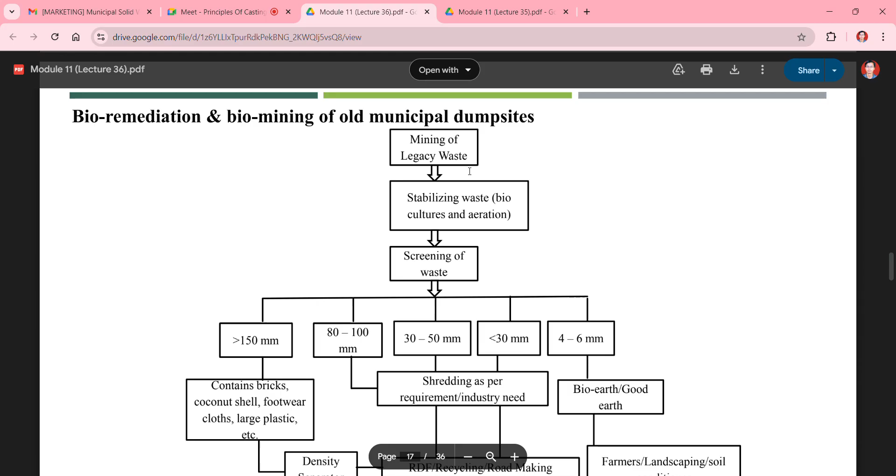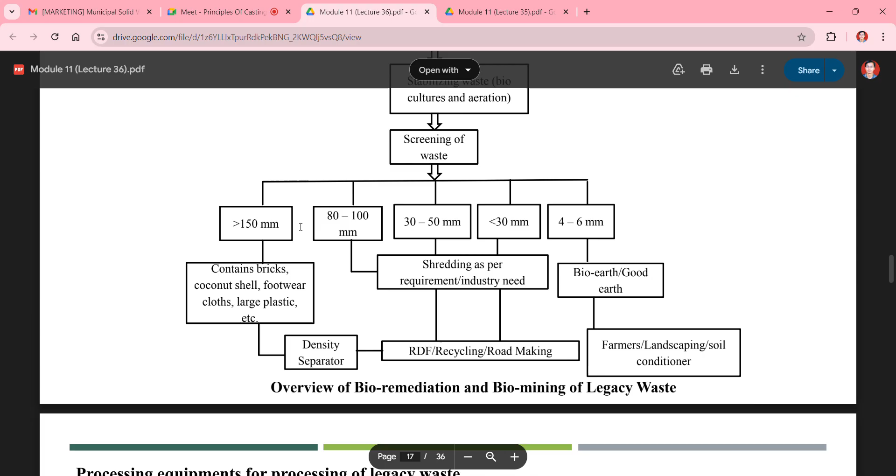Then screening of waste has to be done to differentiate particles into different sizes - particles having size lower than 150 mm and those having size greater than 150 mm.

The larger particles mainly contain bricks, coconut shells, footwear, clothes, and large plastics. These things can be separated with the help of density separators, and then we can go for recycling of these inert wastes, like we can make RDF from coconut shells, footwear, or clothes.

Plastics can be recycled, and bricks can be reused in the road making process, while waste from 30 mm to 80-100 mm will be shredded as per the requirement or industry need, and can be further reused for RDF, recycling, or road making processes.

Waste lower than 4 to 6 mm will mainly contain bioearth or good earth, or we can say organic materials. These can be provided to farmers or land, used for landscaping, or reused as a soil conditioner.

Then processing equipment for processing of legacy waste. The major equipment that would come into use would fall under the following heads of processes: excavation, shredding, screening, followed by air classification and ferrous separation. As per suitability and requirement, appropriate choices should be made.

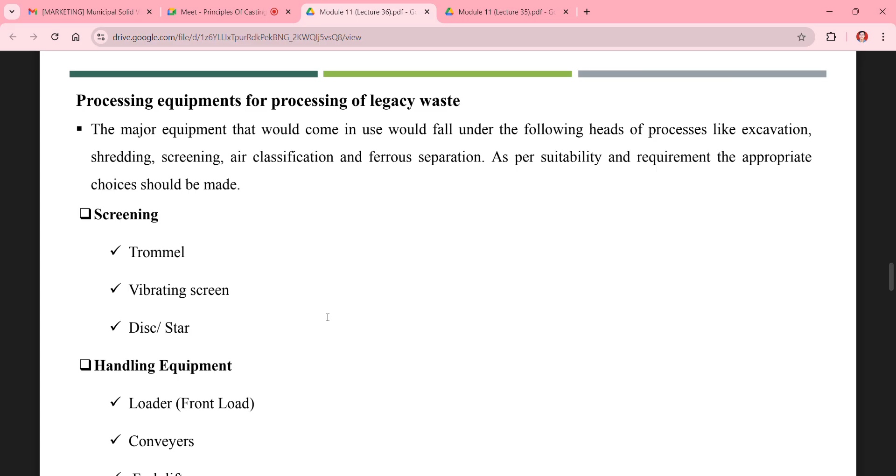Different types of screens can be used, like trommel, vibratory screen, or disc or star type screen. Handling equipment needed includes loaders, conveyors, or forklifts.

Then the process of bioremediation and biomining - there is a schematic representation of biomining through excavator by making windrows. The excavator digs 2.5-meter deep trenches, then large objects are hand picked, windrows are made from remaining waste, and bioculture is mist sprayed - 5% cow dung mixed in water and sprayed on the waste.

What does this provide? It provides microorganisms on the site, and we have to turn the windrow every 2 to 3 days, and after 20 days we have to do the screening. So what we are creating with this process is compost for the soil, which can be reused as fertilizer in the agricultural process.

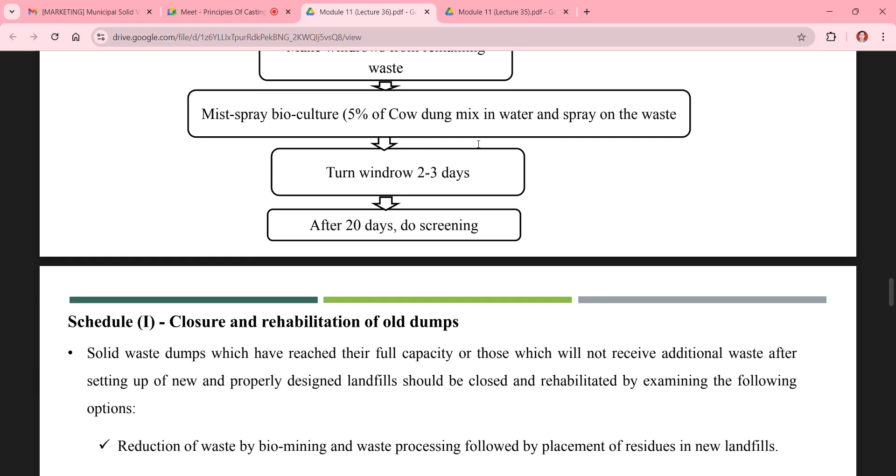Schedule 1: closure and rehabilitation of old dumps. Solid waste dumps which have reached their full capacity, or those which will not receive additional waste after setting up of new and properly designed landfills, should be closed and rehabilitated by examining options like reduction of waste by biomining.

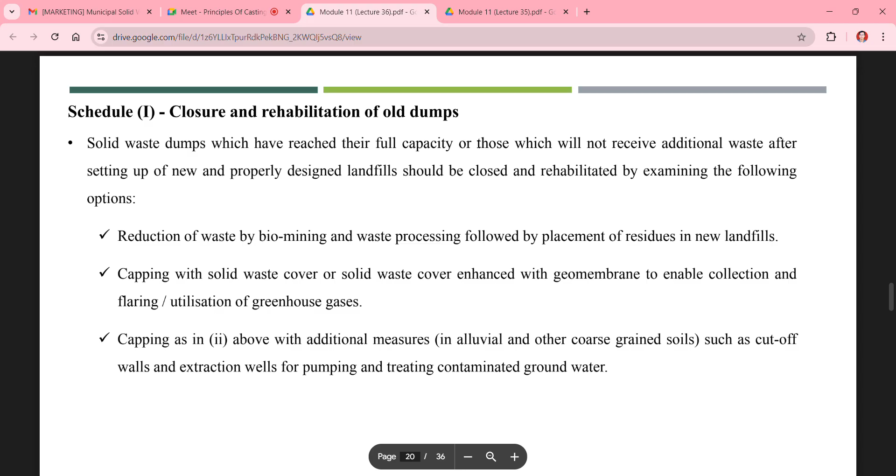If we can reduce the waste by biomining process and waste processing, followed by placement of residues in new landfills, or we can cap the solid waste with a cover, capping enhanced with geomembrane to enable collection and flaring or utilization of greenhouse gases. Capping as above, with additional measures in alluvial areas such as cut-off walls and extraction wells for pumping and treating contaminated groundwater.

We can use different types of excavators, or hand pick different types of objects which can be recycled, like rocks, coconut shells, long pieces of cloth, or large plastic bags. This work can be done by rag pickers, who can resell these items for creating some economy from these dump sites.

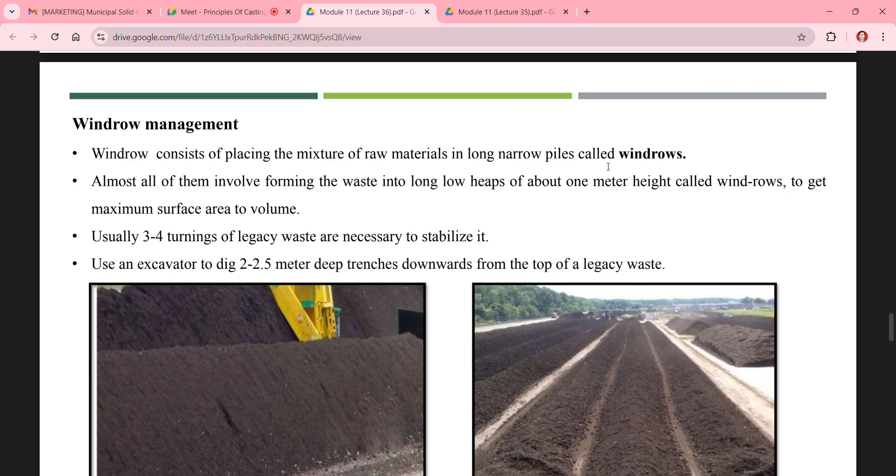Then windrow management - the organic waste contained in these landfill sites can be managed with the help of windrows for creating compost to be reused as fertilizer during agricultural processes.

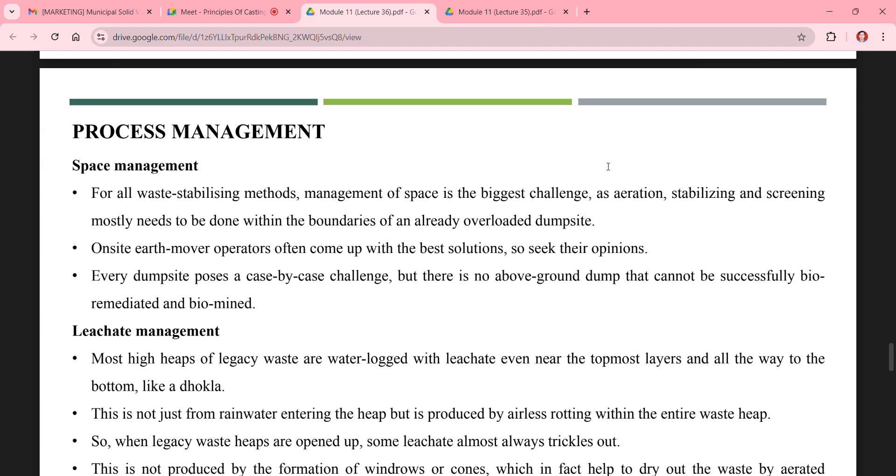Then use of screen fractions, and process management. Space management is necessary for all waste stabilising methods. Management of space is the biggest challenge as aeration, stabilizing and screening mostly needs to be done within the boundaries of an already overloaded dump site. So we have to properly manage the space at that dump site for proper biomining process.

On-site earth movers operators often come up with the best solution, so seek their opinions. Every dump site poses a case-by-case challenge, but there is no above-ground dump that cannot be successfully remediated and biomined. Then there has to be a proper leachate management system provided.

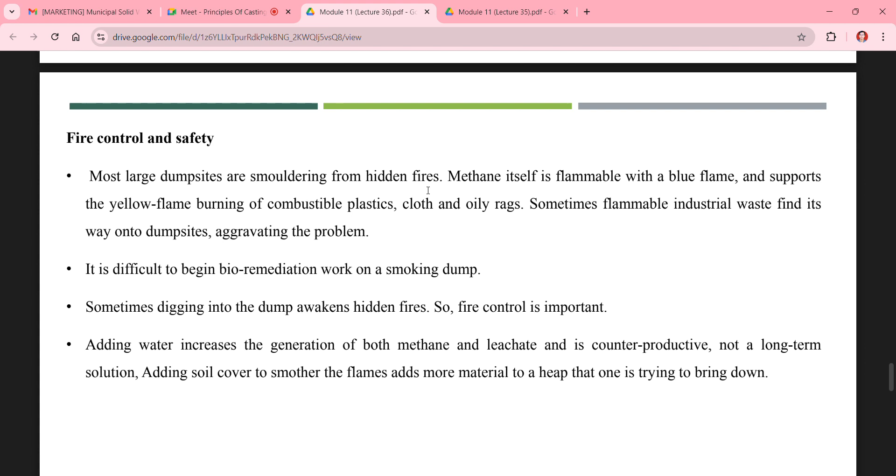Fire control and safety issues have to be kept in mind. We have to provide the proper equipment for controlling fire because these dump sites will produce methane gas, which is highly flammable. So we have to properly control any hazards which can be caused due to fire at that dump site. Then there is also the use of recovered space.

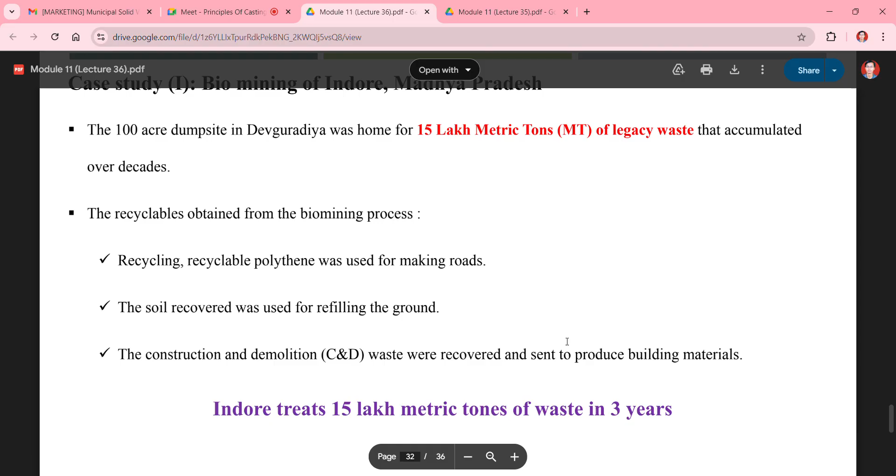There are some cases of biomining in India, like in Indore, where there are legacy dump sites used for biomining purposes. The 100-acre dump site in Devguradiya was home to 15 lakh metric tons of legacy waste that accumulated over decades. The MP government carried out biomining at that dump site.

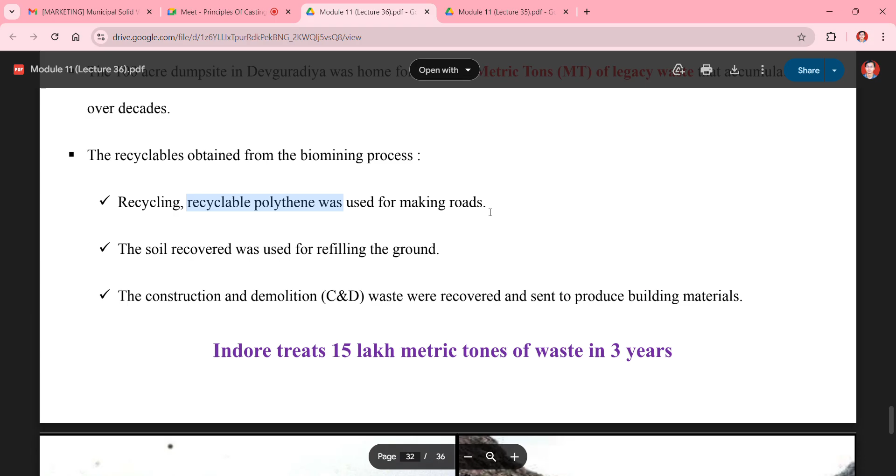The recyclables obtained from the biomining process at this dump site were used for creating recyclable polythene used for making roads. The soil recovered was used for refilling the ground. The construction and demolition waste recovered was sent to produce building materials. Indore treated 15 lakh metric tons of waste in 3 years with the help of the biomining process, and they cleared that dump site.

So previously it looked like this. Now it looks like this.

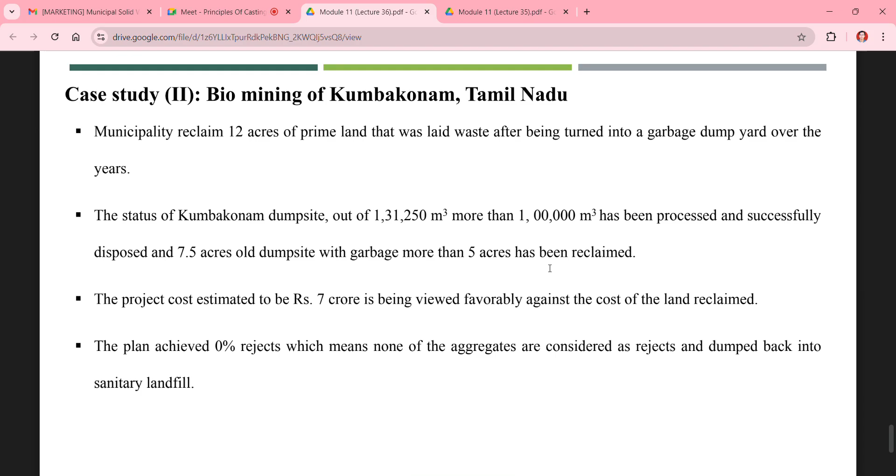Case study two: biomining of Kumbakonam, based in Tamil Nadu. The municipality reclaimed 12 acres of prime land that was laid waste after being turned into a garbage dump yard over the years.

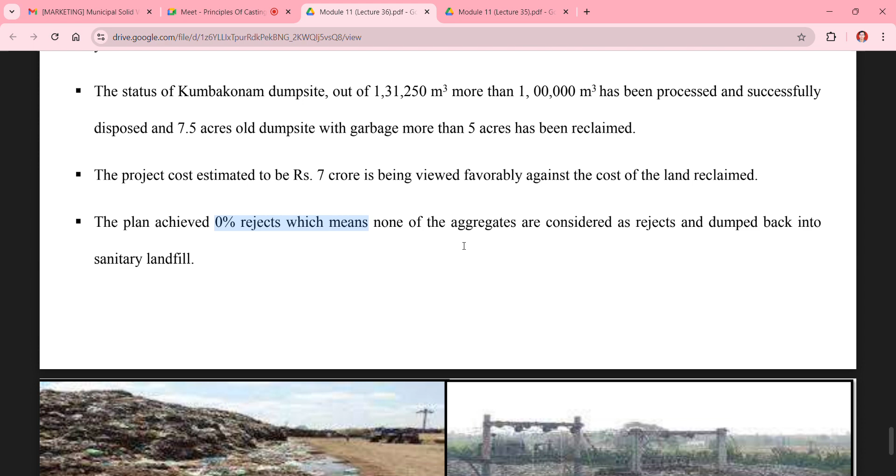The status of the Kumbakonam dump site: out of 1,31,250 cubic meters, more than 1 lakh cubic meters has been processed and successfully disposed, and 7.5 acres of old dump site with garbage, more than 5 acres, has been reclaimed. So until now they have reclaimed around 70% of the dump site. The project cost, estimated at 7 crore rupees, is being viewed favorably against the value of the land reclaimed. The plan achieved 0% reject, meaning none of the aggregates are considered reject and dumped back into the sanitary landfill sites.

So previously that site was looking like this. Now we can see the change in the dump site. Okay, so these were all about the landfills.